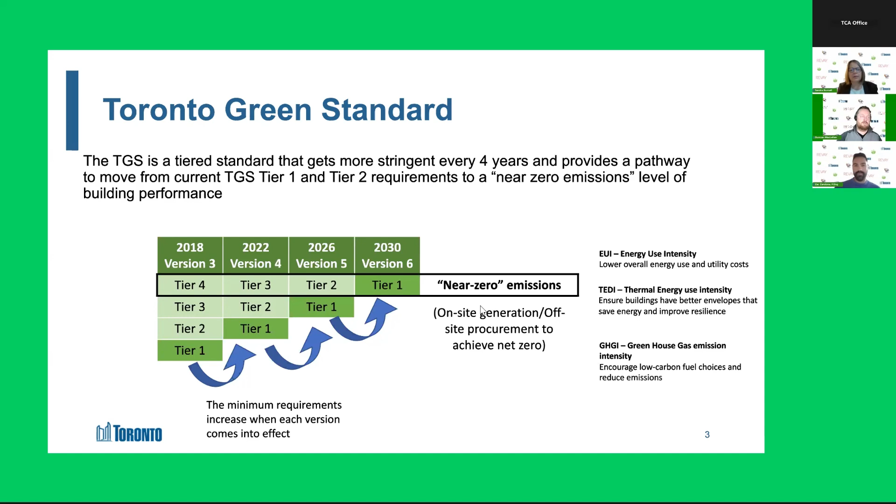Back in 2021, the city declared a climate emergency. As part of that, they directed us to accelerate those greenhouse gas intensity targets that I just spoke about, by 1 year.

So as you can see, I had this chart here, but we're in version 4 right now. Then in 2026 is when version 5 is going to come into effect, and 2030 is when version 6 is supposed to come into effect. But City Council directed us to explore accelerating just the greenhouse gas intensity compared to when versions 5 and 6 were supposed to come into effect.

So in 2025, next year, we may be moving on to the version 5 greenhouse gas intensity, as opposed to waiting till 2026, to further drive emissions down quicker as a result of this climate emergency declaration. And we're also directed to look at accelerating the version 6 greenhouse gas intensity to 2028 instead of 2030. All that to say, the rest of the targets would come into effect as planned: the energy use intensity and thermal energy demand intensity would come into effect in 2026 as planned for version 5, and 2030 as planned for version 6.

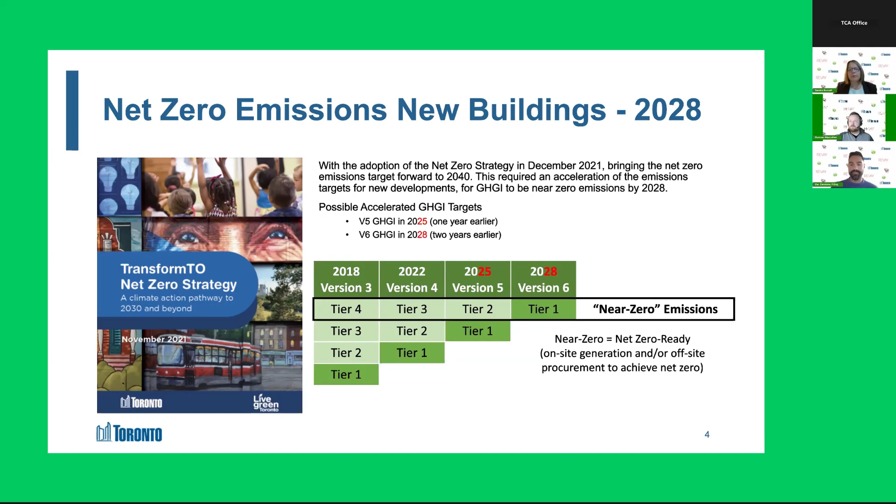So there is an incentive for reaching the voluntary tiers of the Toronto Green Standard, and that is a partial development charge refund. So if you're going above and beyond the minimum, so not tier 1, but tiers 2 or 3 at the moment, then you could be subject to the development charge refund, which ends up being approximately 7 to 8% of development charges refunded to your project, as long as you can prove that you've met the requirements of the Toronto Green Standard voluntary tiers.

We haven't seen much uptake in it, to be honest, especially with version 4. It's not typically enough of an incentive for developers to just go and do this without having their own climate goals and actions. So usually that's kind of the driver for developers to go for the voluntary tiers.

So I'll just get into the different energy standards as part of the Toronto Green Standard for different common archetypes in the city. We have energy requirements around low-rise Part 9 residential, so townhouses fewer than 4 stories with a minimum of 10 dwelling units. Then we have other requirements for mid to high-rise residential and all non-residential Part 3 buildings. And we have a separate standard for our own buildings, our city agency, corporation, and division facilities.

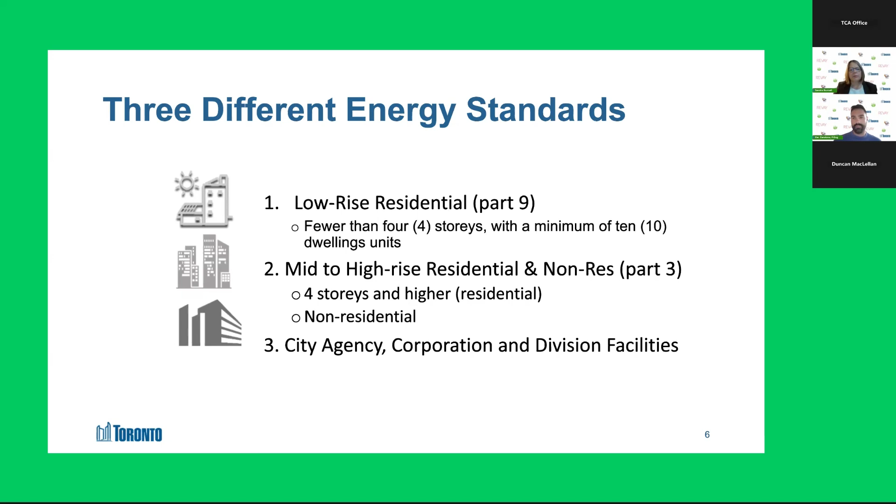So for Part 9 buildings, so townhouses, Tier 1 must follow Energy Star or R2000 compliance options as per the energy efficiency design summary form that you see right here.

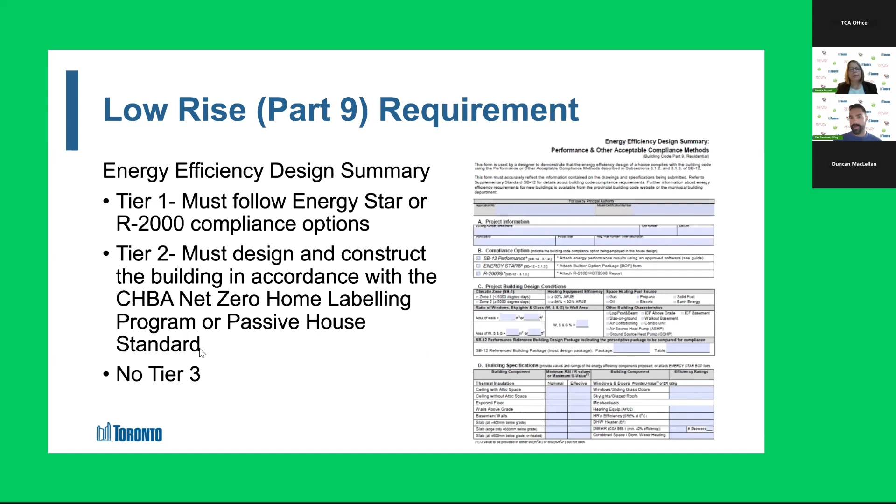And then if a Part 9 building is going for the Tier 2 requirements, they must design and construct the building in accordance with the CHBA Net Zero Home Labeling Program or Passive House Standard. And then we don't have a Tier 3 requirement for low-rise.

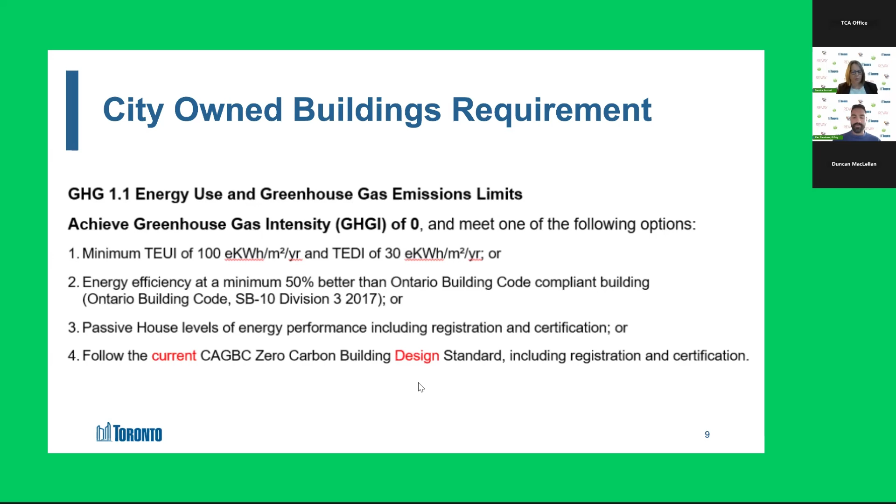We're building net zero now just to show that it is possible and give the industry comfort that there are solutions. With that greenhouse gas intensity of 0, one of the following has to be met: either show a minimum energy use intensity of 100 kilowatt hours per meter squared per year and a thermal energy demand intensity of 30 kilowatt hours per meter squared per year, or show that they are performing 50% better than an Ontario Building Code compliant building through an energy model, or achieve passive house levels of performance through passive house certification, or get certification for the Canada Green Building Council Zero Carbon Building Design Standard. That is also another compliance option acceptable for city buildings.

So as of about a year and a half ago, we introduced embodied carbon requirements as part of the Toronto Green Standard as well. They are largely voluntary at the moment. For privately owned buildings, there are only targets for tiers 2 and 3. There is no tier 1 mandatory target at the moment, but there is a mandatory target for city-owned buildings.

In order to meet our targets, applicants have to provide a life cycle assessment for life cycle stages A1 to A5 of a building's life. Those stages include raw material extraction, transportation to a manufacturing facility that manufactures the material, transportation of that material to the construction site, and emissions associated with the construction and installation of that material. So life cycle analysis has to include all materials used for the structure and envelope, and the life cycle stages A1 to A5 that I just described.

The mandatory city-owned target and the tier 2 privately owned building target for embodied carbon is 350 kilograms of CO2 per meter squared for residential and commercial buildings, and 400 kilograms of CO2 per meter squared for other building types. And then we have a target as well for the low-rise Part 9 buildings, and that is 250 kilograms of CO2 per meter squared.

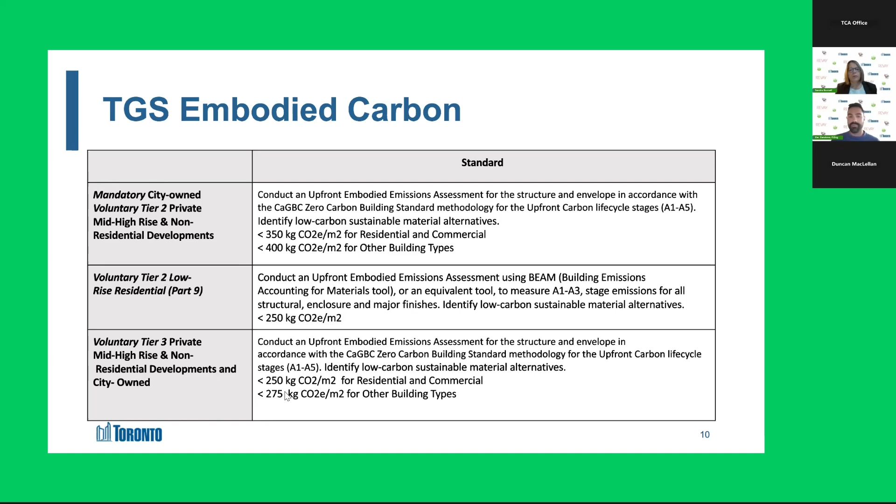So I have some common solutions in order to meet some of the tiers of the Toronto Green Standard for typical buildings that we see in Toronto, or most of the applications that we get, which are mid to high-rise multi-unit residential buildings. A typical design package to meet our current minimum requirements, which is tier 1: on the mechanical side, ground or air source heat pumps for space heating and cooling are very typical. It's not necessarily required, but we do see a lot of ground and air source heat pumps for space heating and cooling. A gas boiler for domestic hot water is usually sufficient for tier 1.

When it comes to the envelope, aluminum window walls with about an R10 usually suffice. Double glazed windows, a 40% window to wall ratio, and thermally broken balconies will get you to that tier 1 for a multi-unit residential building.

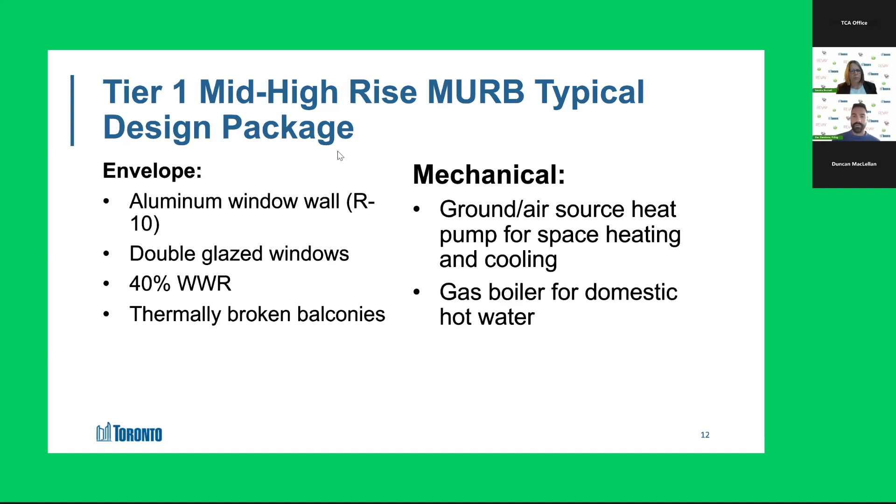Oops. Sorry, I just went too far.

Now, I don't have a design package for tier 3 because we haven't seen a tier 3 mid to high-rise multi-unit residential building yet, but just know that all domestic hot water, space heating and cooling needs to be electrified for that kind of building, and you need a really high-performing envelope with reduced thermal bridging and all that contributes to a good envelope.

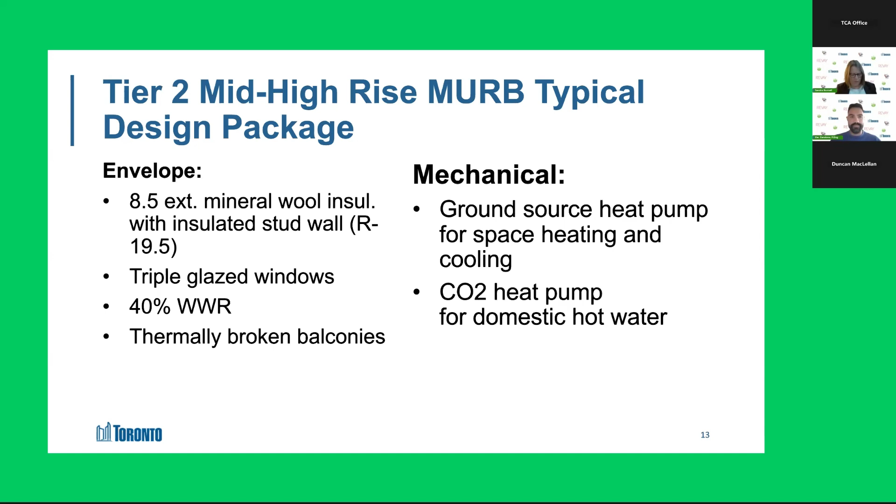Some best practices to reduce embodied carbon in order to meet our voluntary embodied carbon targets if you're a private building, or mandatory embodied carbon targets if it's a city building.

You can first ask suppliers for low carbon options for materials and focus on high volume materials that make up the structure and envelope. Concrete and steel are definitely the highest emitting materials we use for construction today, so figuring out where the low carbon options are for those materials is a great start.

You can also use less materials by avoiding things like transfer slabs, which reduces the need for as much concrete.

You can also use less materials by reducing step backs and below grade construction. A lot of concrete goes into underground parking garages, so if you reduce those parking levels, you can find great reductions in embodied carbon.

You can use less materials by avoiding using all new materials. If you have something existing on site, reusing anything that's already there is always a good option as well, if possible.

When it comes to concrete specifically, you can explore concrete mixes that use as little cement as possible. Cement is the component of concrete that is most carbon intensive, so if you use concrete with more slag, for example, that reduces the need for cement, which reduces embodied carbon.

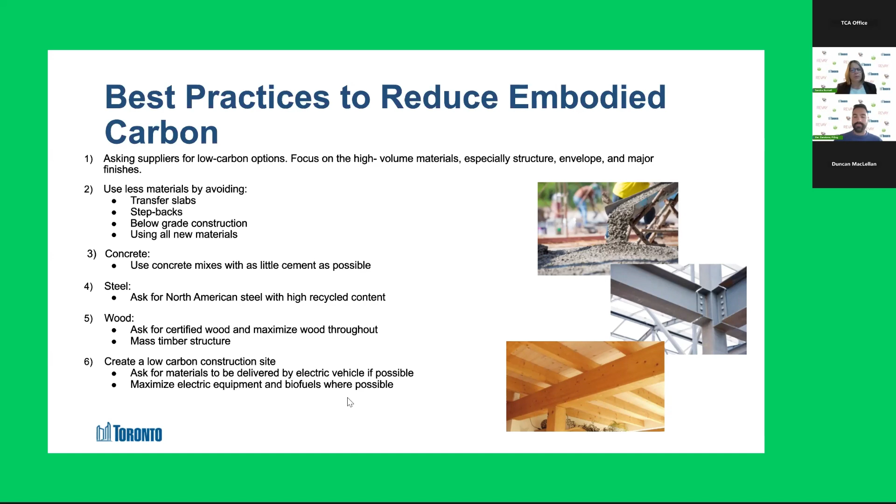That's it from me. On the new development side, I'll hand it over to my colleague Duncan, who will be going over the existing buildings policies that we have at the city.

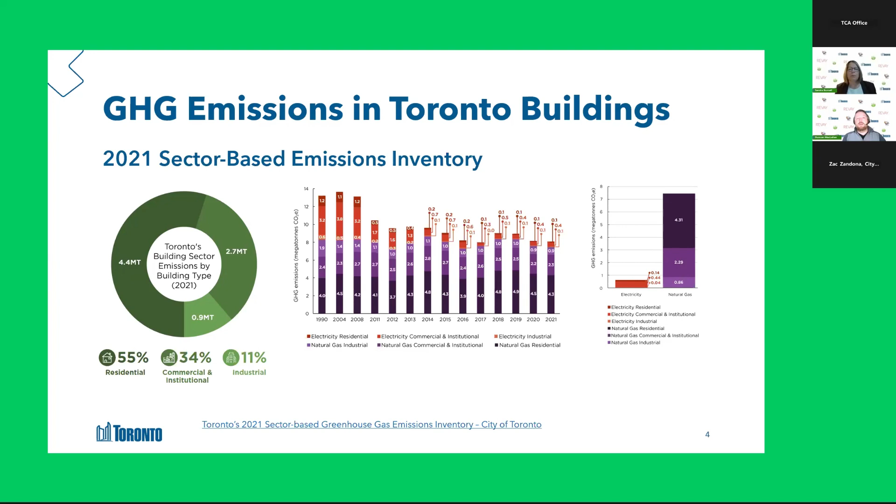So when we were putting together Transform TO, we had our new development group talk about how to reduce emissions in new buildings. Then we said we've got to do existing buildings at the same time, because if you have a new building, how are you going to look at the whole life cycle of this building? Most buildings in Toronto already exist. So we put together a strategy that came out with 9 recommended actions for existing buildings, and I split them up into 3 different portions.

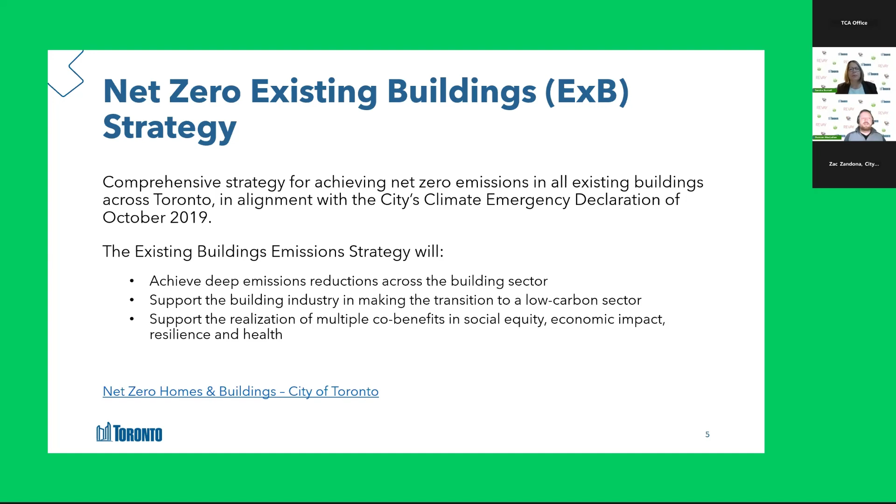I'll have the link to the entire report, and there's also a 1-page summary which a lot of people like reading, but it's about a 75-page report, and it came down to 3 sets of actions of 3.

The first one we like to call sticks. It's policy based, it's mandatory pieces, it's mandatory reporting, it's emissions performance targets, and other mandatory pieces.

The second piece is support pieces. How do we support the industry with the necessary items to prop them up, whether it be financing, whether it be technical support, all of those.

And then the third piece I like to call it a microphone. I don't know if that's the perfect word for it, but it's advocacy to different governments. It's supporting the workforce development, and it's education of the industry and everyone all around. It's where we end up talking with people the most.

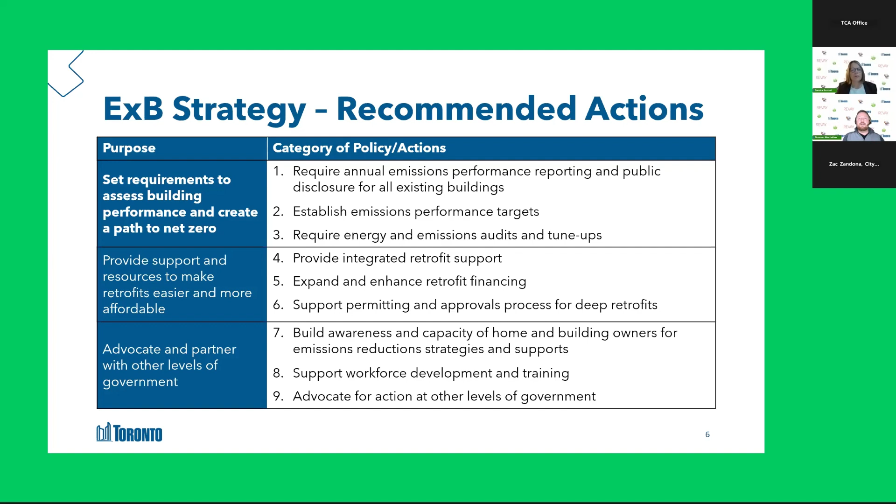So our first piece has come down, and it's actually 8 days until the reporting is due for our first bylaw. We have an energy and water reporting bylaw where all existing buildings over 50,000 square feet have to report their energy and water usage to the city.

The province already requires this for 50,000 square feet and above. We have made sure that it's the exact same reporting tool, so if you're reporting to the province, you also report to the city. It's less than 10 additional clicks on the reporting tool. That was really important when we were developing this bylaw, to make sure that people didn't have to enter their information in 15 different places all the time.

The reason why the province can't just pass that information over to us is there are legal reasons. We're still working with them to see what can be done, but at this point, that's the reason why they can't just give us the information. That's a question we generally get about that.

So who needs to report and when do they need to report? The province has a whole bunch of exemptions based on different building types. We don't really have those exemptions in the City of Toronto. Next year we are looking to take the reporting requirements down to 10,000 square feet, which would drastically bump up the number of buildings that need to report. You can see these are approximate numbers here.

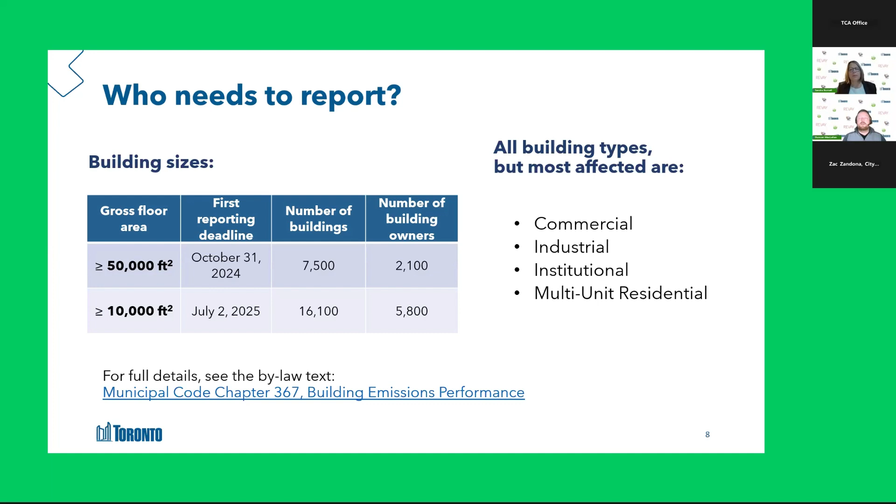When doing a jurisdictional scan, we found that building performance standards, building emission performance standards, or BEPS as it's called, is one of the best ways to improve and really make impact on a scale for emission reductions. To have relevant numbers to figure out how we set our building performance standards, where we set those limits, we need to figure out what buildings in the City of Toronto are using on a building-per-building basis. So as we get that reporting in, we will use that information to inform our building emissions performance standards.

People then ask me the next question, which is, when is this coming? So the next step is staff is proposing a bylaw on emission performance standards to council in Q3 of 2025.

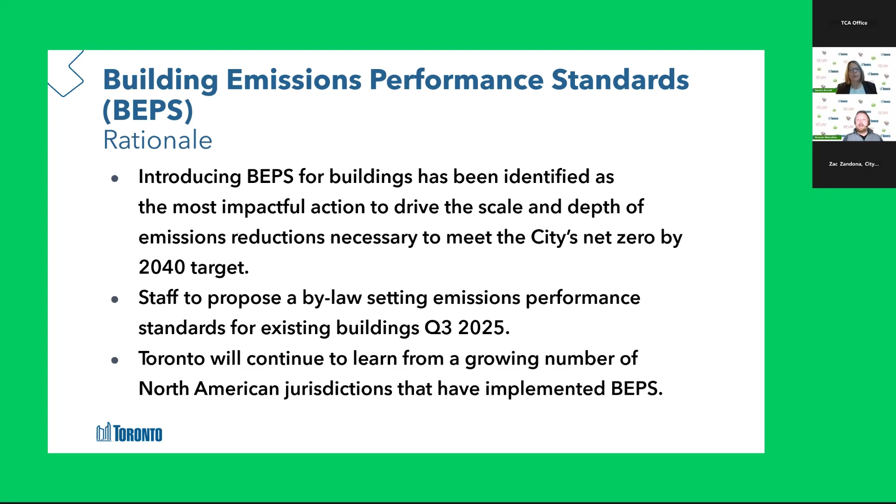This is what I was talking about before in terms of engagement. As we go through the bylaw, we are doing lots of different engagements. One of them is the Toronto Construction Association, which is on our list for engagement, and we go back and forth with the team there. They are on some committees, and we look at the technical side, the legal side, all the different pieces, and then when we go out to the market, how do we create supporting structures, programs, and resources around them?

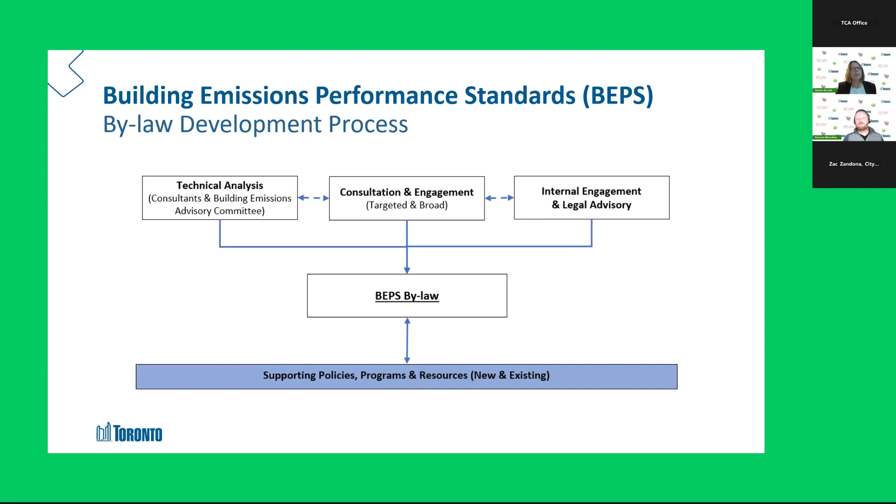To be totally honest, all the contractors across the city are our partners in implementation. All the work is going to be done by building contractors, HVAC contractors, all the people who will be doing the work across the city. Building knowledge and capacity within the industry is a huge piece we're looking to do, along with making sure we have demonstrative projects. We're working to build resources and huge case studies to show it can be done in the city. It is being done in the city, and here's how you do it.

In terms of our programs, how we support, we've broken them up into a couple of areas: support guidance, financial incentives, and different policy pieces. Policy is kind of the stick piece, and finance, support, and engagement guidance are the support sections. Our main catch-all one is our navigation support services.

This is really where a building comes to us and says, hey, I don't know where to start, where do I go? We'll help send you resources. We say, what type of building are you? Here's what's available, whether it's provincial, federal, or municipal. We give all the different incentive programs, financing programs, technical support programs, all in one location. You just fill out what type of building you are and send it through.

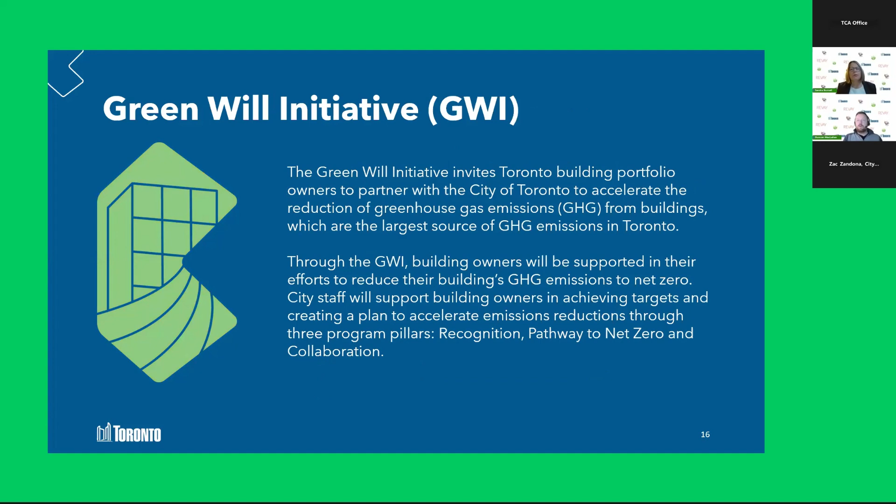The Green Will Initiative is another one we work with. They're some of the largest building owners in the city, and the key part is we want to collaborate and build those resources together. For example, Oxford Properties, Brookfield, Starlight, Dream, they're all in this Green Will Initiative, and we're working together to share best practices, show different projects, and create a resource database so everybody can share and learn from it.

We also want to recognize some of the organizations that are doing great work. So if you're doing great work with one of these organizations and you want to highlight some of it, this is a great avenue we could use to show the rest of the city.

We have a loan program, which is pretty much a pass-through of the city's cost of borrowing, but it is mainly focused on low carbon. So if you're interested in seeing if the city can be your lender for the loan program, you can check that out, but it is a low carbon requirement for these loans.

One of the example projects we were talking about, how do we create some of these case studies to show what's happening in the city of Toronto? We're in the middle of a program called the Deep Retrofit Challenge, where we've gotten funding from Natural Resources Canada to develop a whole bunch of different projects that go super deep on greenhouse gas emissions. It's a minimum of 50% reduction in your total energy use intensity. Most of these buildings are going for 70 or 80% reduction, and we're giving them some money to top up on top of it.

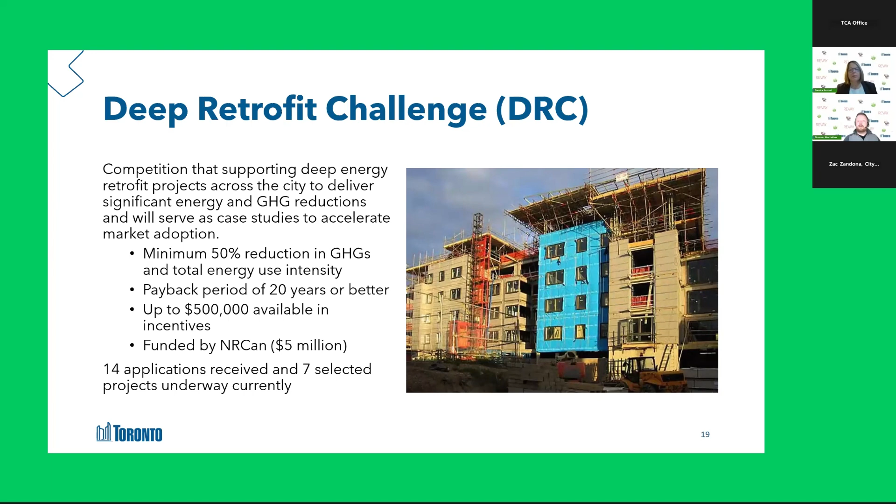If you're doing projects on the residential side, we have a home energy loan program that homeowners can borrow, and it goes right on their taxes. So the repayment stays with the house.

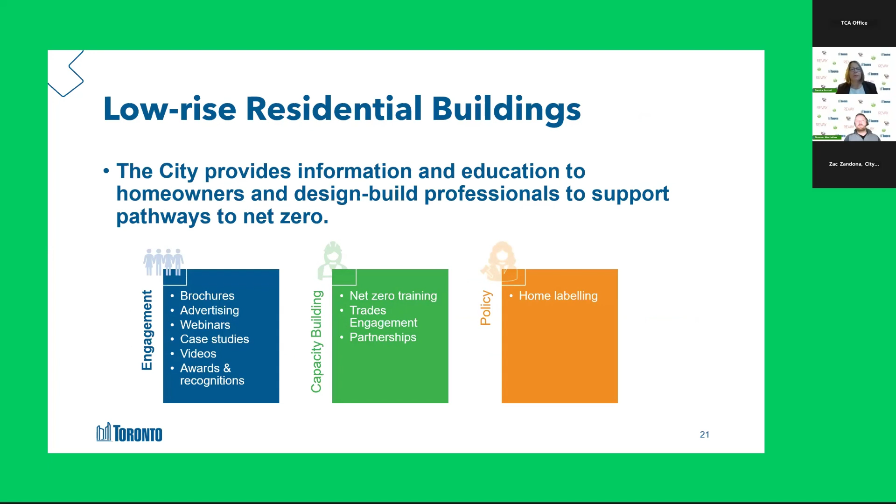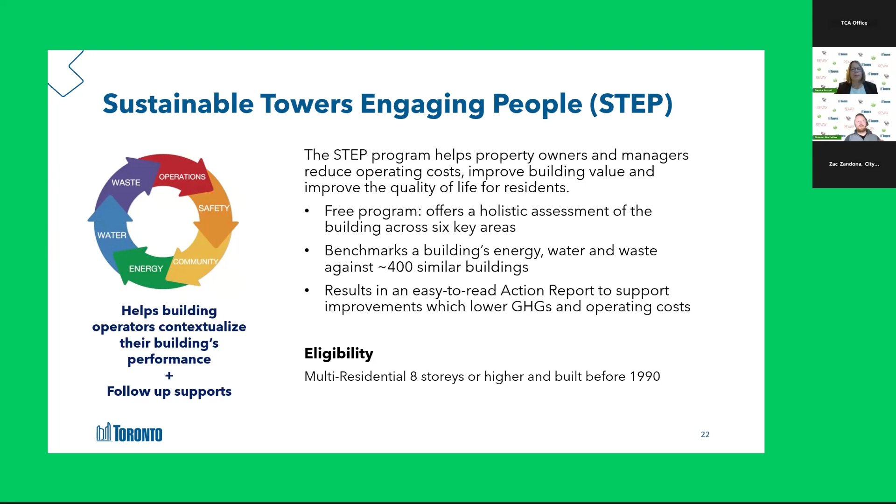And then we also have information for low-rise buildings. As Zac was talking about, there are differences for low-rise and high-rise buildings, and we have some low-rise resources, as well as if we go into the high-rise, we have our Sustainable Towers program, our STEP program, which goes through and does a free audit of the building on a couple different levels, everything from safety to community engagement to energy. They also have their own financing program as well, so we can tap into that.

And then kind of lastly, we have green roof programs as well. So if you're building, some of the requirements for Toronto Green Standard need some of these, but there are also, you can create green roofs and there are incentives for that as well. And they've been quite successful over the last few years.

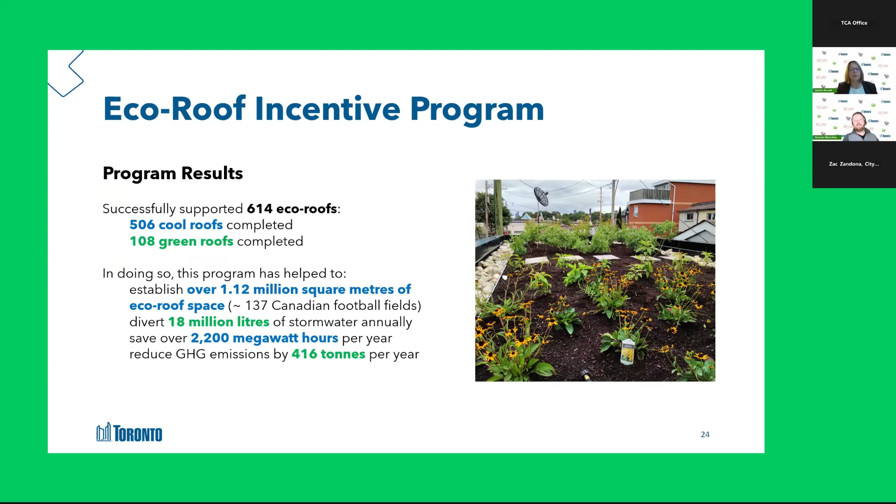And finally, I put together everything on a links and resource page at the end of here so that when this is sent out by the TCA, everybody can just click on some links. Sandra, that's it from my angle.